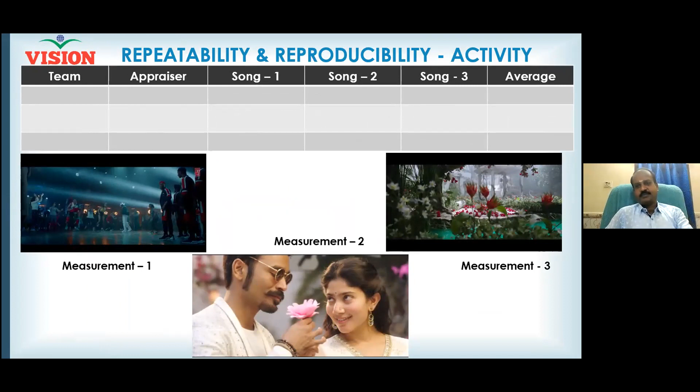Thank you, sir. We'll go to the calculation, and also we'll see one case study, and then you will become a master of this, and you can design. As I always say, as a black belt, you must create your tool which will work best for your process. You must find out.

Okay, now I go back. Just a second. Very good. All right.

Right, capital. Now the overall standard deviation I want to know. What is overall standard deviation? It will include repeatability error and reproducibility error. How to calculate repeatability error? Let's say Alok has measured a product 10 times.

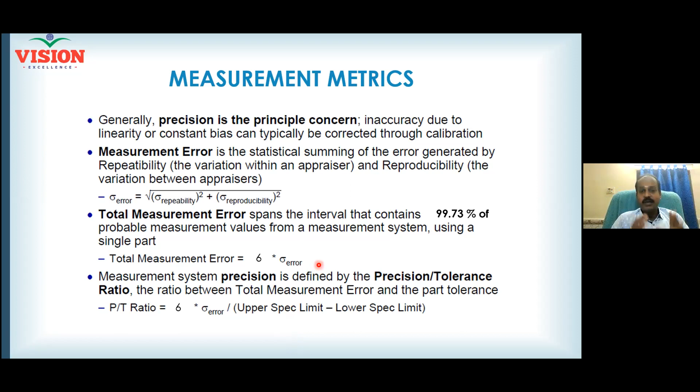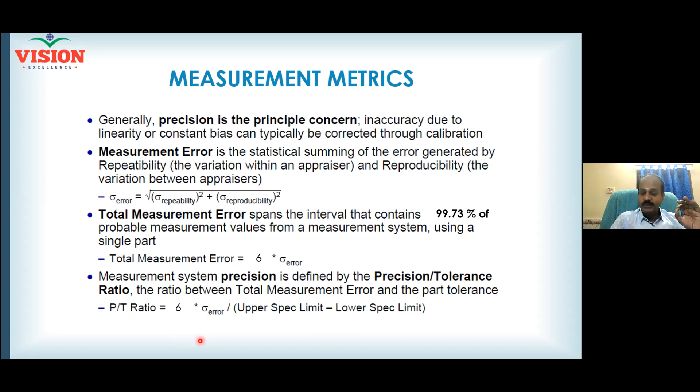What is acceptable is 10% or even less. This ratio is called the precision tolerance ratio. This precision tolerance ratio is otherwise called gauge R&R. Do all of you understand what gauge R&R is? Precision tolerance ratio - you know how to calculate the tolerance, and you also know how to calculate the precision. This ratio needs to be less than 10%. If it is less than 10%, you are sure your data is speaking the fact, the reality.

Otherwise, you must be cautious - your data is giving you a false alarm. You should know when your data will give a false alarm: when the measurement error is too much. Industry standard is less than 10% is always acceptable. More than 30% is always unacceptable. Never do a project with a measurement system having a gauge R&R of more than 30%.

The project itself should be titled 'improving the measurement system.' Don't get into an improvement project when you have a problem with the measurement system. The project title itself should be 'improving measurement system's accuracy and precision.' That is the title. So 10 to 30% is conditionally acceptable.

Now I want somebody to tell me where. So green and red are very clear - when gauge R&R is less than 10%, I am feeling good. More than 30%, I am very sure I should not use this measurement system. Rather, I will either replace the measurement system or run a project to improve it and then come back to my original project. What is the meaning of the middle one, 10 to 30%? Can somebody highlight on that? When will I consider my data as conditionally acceptable?

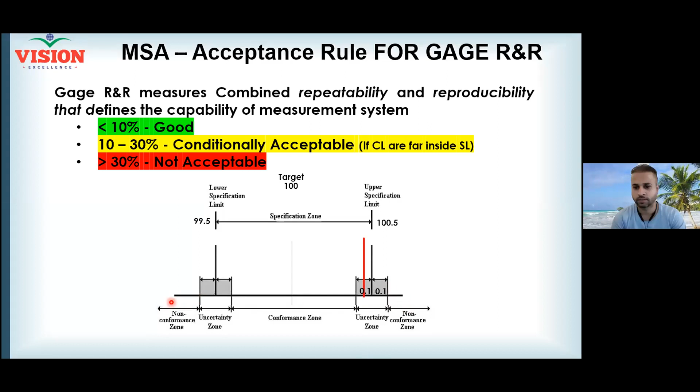What could be the dimension of this product at this point? Can somebody make a guess? Will it be less than 100.5 or more than 100.5? Less than, less than. Can you give me a sample value less than 100.5 which can lie exactly at the red color line? 100.4, 100.45.

Very good, beautiful. I take 100.45 to be safer on the center. Now 100.45 is the true value. Your quality inspectors are measuring the product. They commit an error of 10% because you estimated it. What is 10% of that error, which is 0.1?

100.45, either they will add 0.1 or they will subtract 0.1. If they subtract 0.1, they will place this product on the left side. Am I right? Yes, and then they will accept the product.

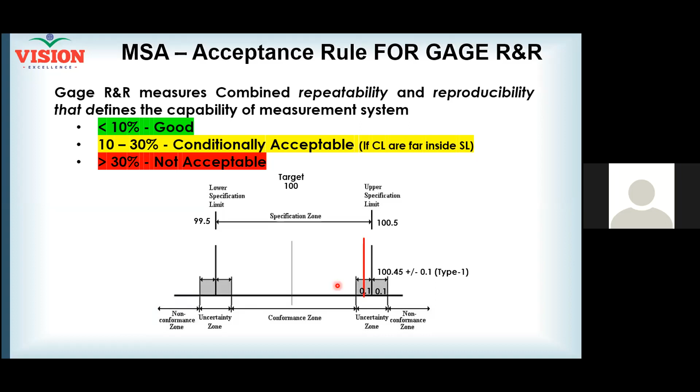Suppose if they add the error, they will place the product on the right side. Now what is right side? Your product will now be rejected.

Now, but what is the reality? Your product is uncertain, acceptable. The product is acceptable, but your team has rejected it. Your decision is getting affected. Do you still feel the error is okay for you? Even 10% is changing your decision.

Do you understand? Even 10%, though someone says for my company that 10% is also not helping me, that 10% makes me a wrong decision. I think that my product is good, or I think that my product is bad, but no, I do the opposite. My product is good, I reject it. But my product is bad, I send it to my customer. Am I doing favor to my business with my measurement?

Damaging. So it is not always advisable to produce product closer to the specification. Because even if you produce a good product, still your quality team can reject it. You are increasing that uncertainty more. So if I produce like this, it is not advisable. Am I right? Yes. So I won't do this.

I will try to produce everything far inside the specification limit. That is why we are always interested in seeing where is our control limit. If my control limit is well inside, well inside means, see my uncertainty zone. Earlier it was only this much. And now what happens? All my readings are well inside the conformance zone.

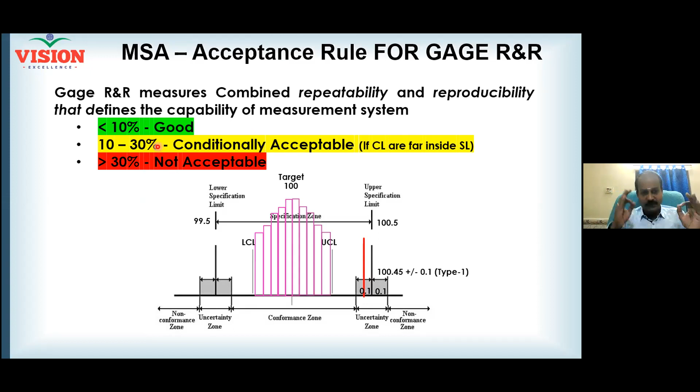Using the same data, I will analyze whether my repeatability is high or my reproducibility is high. If it is repeatability, now who is that culprit? Whether it is operator 1 or operator 2, who is more not repeatable or who is committing more repeatability error? I will give him special training. Who is not aligning with the system, thereby my reproducibility goes wrong. All that I will do.

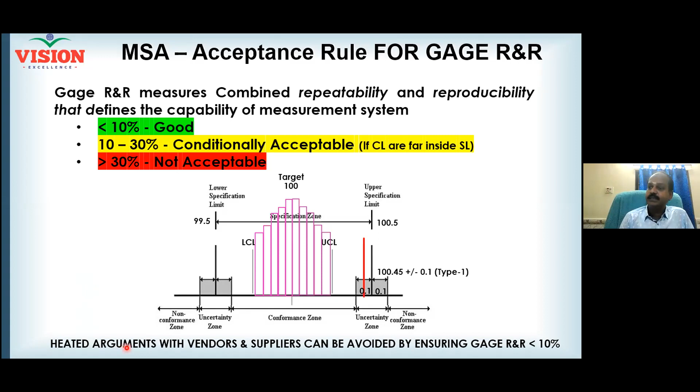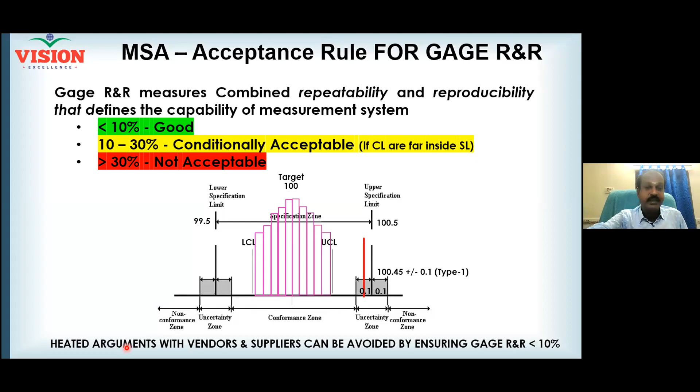So when you keep your measurement system under control, you can avoid heated arguments with your vendors, heated arguments with your suppliers, heated arguments with your consumers. How they measure, the same way you should measure. What reading they get, the same thing you must get. That means your measurement system is in order.

Now let us get into a small case, a simple case. I really don't want you to do all these calculations manually because Minitab will do it. You can do it in Minitab.

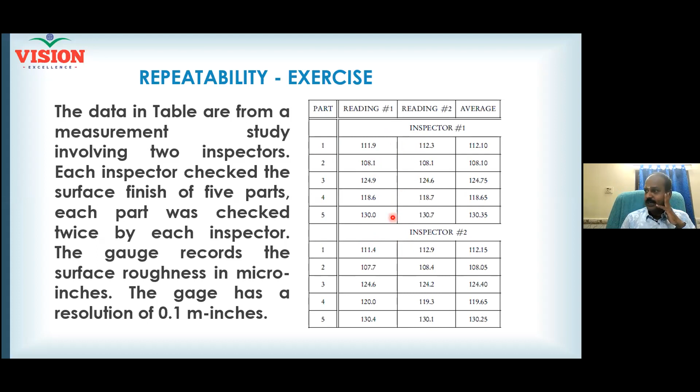Now see here, there are 5 products: part number 1, part number 2, part number 3, part number 4, and part number 5. How many quality checkers? Inspector 1, Inspector 2. Each product, Inspector 1 measures 2 times. Similarly, Inspector 2 also measures 2 times. So Inspector 1 produced 10 readings, Inspector 2 produced 10 readings.

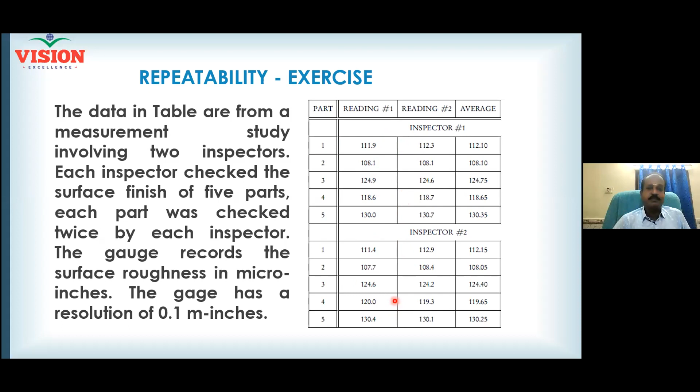Now, what is repeatability here? What is reproducibility here? Shall we calculate? Are you interested to understand the calculation? Yes, sir. Or if it is boring, you can use Minitab. Will you understand? Fine. So what I want is, and this is required, we'll come to the average later on, but first let us calculate the repeatability.

Now, there are 2 readings. These 2 readings are not the same. So this is called repeatability error. Now, since there are very less number of readings, instead of calculating standard deviation, please calculate range.

When to prefer range over standard deviation? If the number of readings in your hand are less than 8, don't calculate standard deviation, instead calculate range. Range is the difference. How much is the difference here? 0.4. Right. Now for the second reading, you can calculate. It's the same, so range is 0. So you have 5 ranges from Inspector 1.

Clear? More the range, more the error. So I am going to convert this information into error. Similarly, Inspector 2 has 5 ranges. Totally how many ranges? 10 ranges. Now I will calculate the average of the ranges.

Is it possible? Yes, yes. 10 ranges, I will take the average. That is called R bar. Now this R bar, I must divide by a factor called D2.

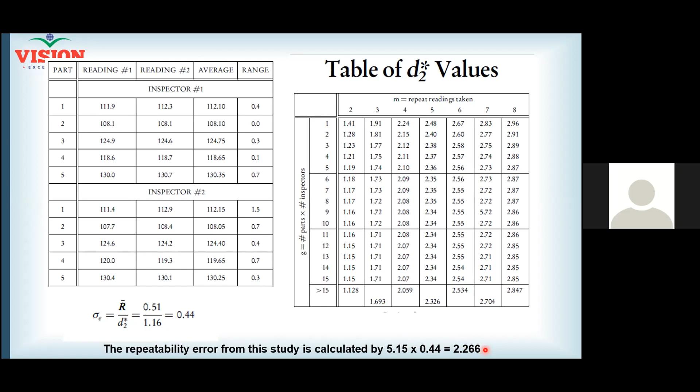What is this? Repeatability error. Where from did I get it? Sigma repeatability. What is sigma repeatability? You have seen in the calculation. This is how you must get it. Now we move on to reproducibility.

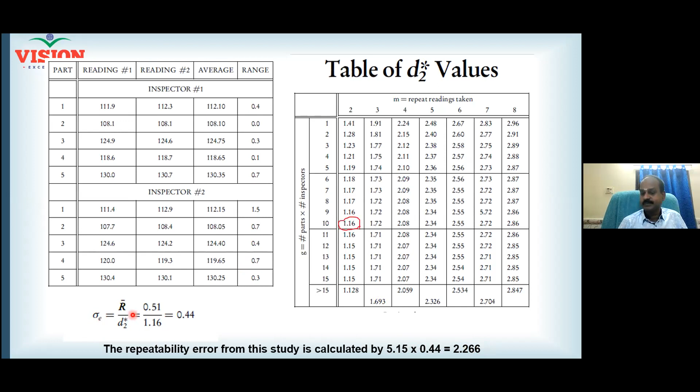So 1.16 we understood. Probably for reproducibility, we will use 1.41. I will tell you how it is. Let us go to the situation.

Now I need the average. You see, operator 1 for part number 1, he has 2 readings. So I take the average. You can add, divide by 2. How many averages? 5 averages. Again below, 5 averages. What is reproducibility?

The difference between the operators is called reproducibility. And how to find out the difference between the operators? He has 5 readings and I have 5 readings. How will I do it? I will calculate the average of operator 1 and then the grand average of operator 2, and find out the difference. When there are 5 averages operator 1 has got, I will calculate the grand average.

See here, 118.79. You know how this 118.79 came? Average of the 5 averages. Similarly, 118.90, average of these 5 readings. Already each number is an average. Now 5 averages, and now I calculate average of the average. And now 1 average here, 1 average here.

Now I calculate the range between the averages. Are we measuring correctly? Yes or no? Yes. We are trying to understand the difference between inspector 1 and inspector 2. Right. So the range I calculate, range is nothing but difference between the averages.

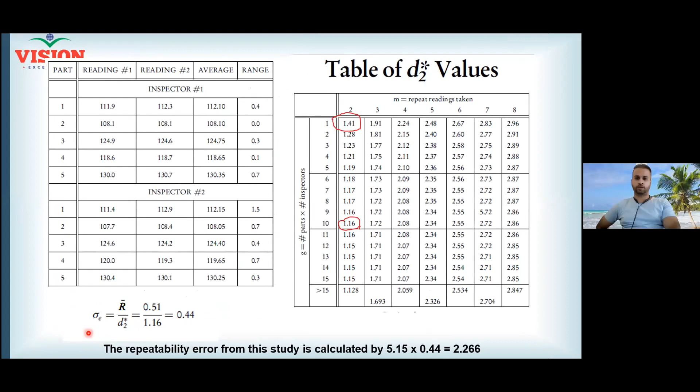Now I need to combine. Now see, when you want to combine, what you have is sigma. How will you combine sigma of reproducibility with the sigma of repeatability? I square them separately, add them, take the square root.

Finally, I know the overall precision, only this will retain. You will be able to retain 0.44 because reproducibility is 0. If it is not 0, I will combine it. So reproducibility is 0, but repeatability is there. Precision error is maybe 5.15 into 0.44.

Precision is understood. Now refer to your tolerance. Divided by the tolerance, that will be your gauge R and R. Will you be able to calculate? Yes. Okay, so this is to understand the calculations behind gauge R and R.

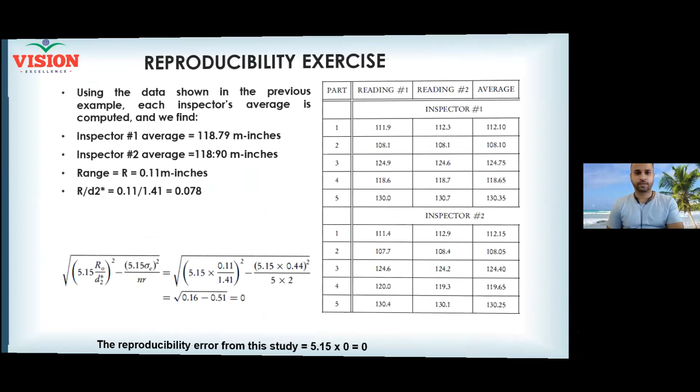Now, Sir, one question, sorry for interrupting. No problem, yes. So can we go back to the earlier slide? Yeah. Now here, what we have taken into account is that we are subtracting the repeatability error from the reproducibility R by D2. Yes, that is reproducibility minus repeatability, squared off and then taken square root. Correct.

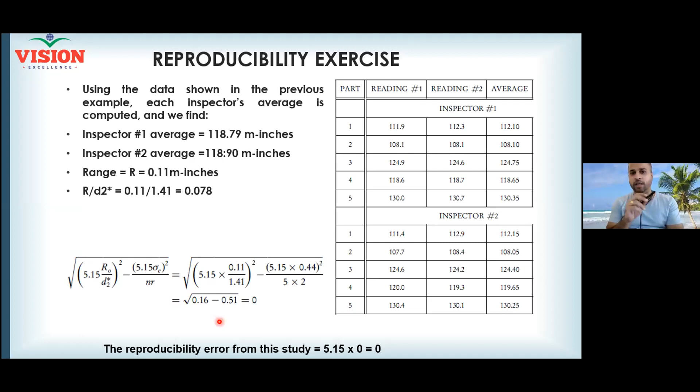Now, when we are calculating this, again we are squaring, again combining both repeatability and reproducibility. Once we have subtracted the repeatability here, then again finally we are adding the square to get the total impact. So does it not anyway neutralize it?

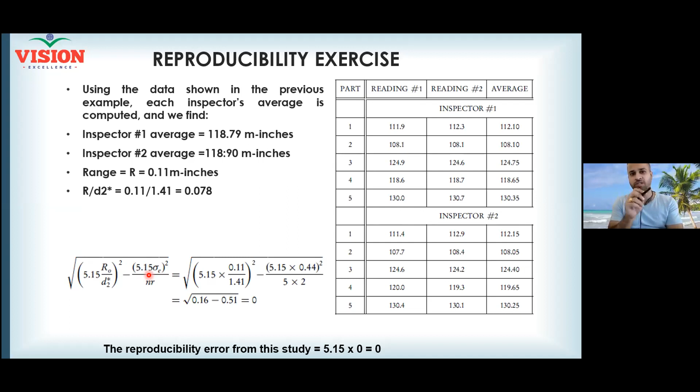No, I got your question, a good question. See, repeatability is one form of error that we have clearly figured out. We know it is 0.44. We are not subtracting the entire thing there. Now we are in the process of calculating reproducibility. For calculating reproducibility, I made use of only the averages.

Suppose if the number of repeat readings are 2, my average comes from 2 readings. Suppose if repeat readings are 3, my average will come from 3 readings. So average is nothing but the central point in your reading, the center of your reading. Since I just take the center, this reading definitely has the repeatability issue. When I take the center, half of the repeatability issue I am carrying in my average.

So this unnecessary carrying of the repeatability component should be eliminated from your reproducibility component. That's only the portion I am trying to eliminate here. I am not simply subtracting the repeatability error which we calculated already. No, that is different, no confusion there. We measure the repeatability, but here when I measure the reproducibility, I am not using the real data, I am using only the average.

And so that is an approximation. That approximation, I am trying to perfect by bringing a new element in my formula. That's how I go close to reality. So that is what you say in statistics, while calculating mean, sample mean, we are putting n-1, like that this is.

Yes, n-1, that's altogether a different subject. N-1 is called degree of freedom. To arrive at those kind of assumptions, only here also. Why do we go for n-1? We know always our sample value will differ from the population value. That's why instead of n, we change the formula to n-1.

Exactly. See, statistics is never 100% accurate. We are only trying to go closer to the reality. We will never say my decision is 100% confident. It is not mathematics, it is only statistics. So you don't need to really worry about each and everything. This is based on experience.

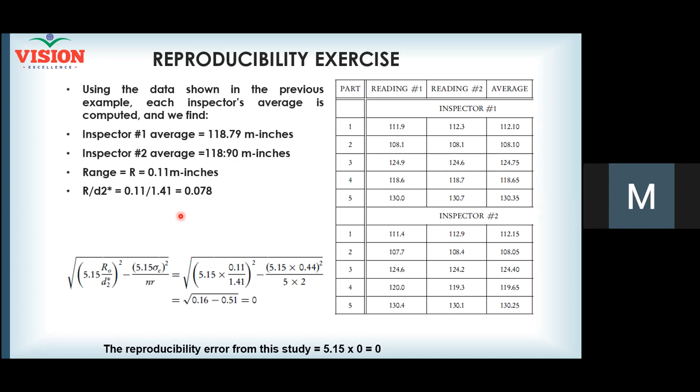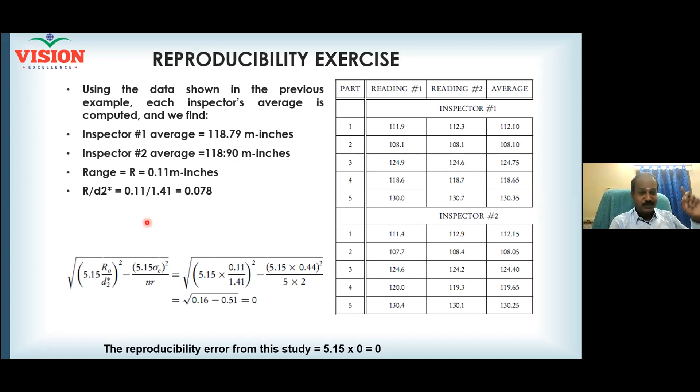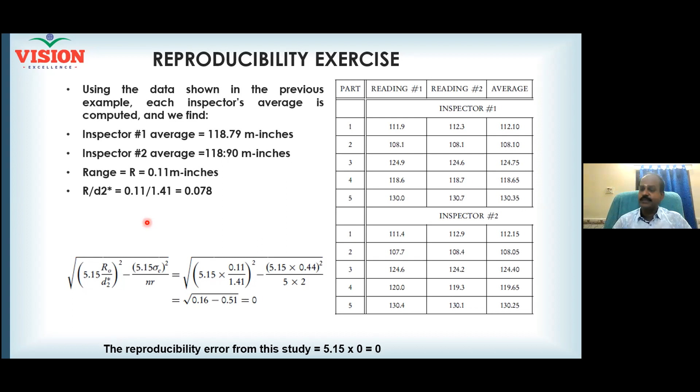But when my requirement is not measuring the error, but I really want to understand what is happening in real time, I will decide not to include the outlier. If I want to understand the error, I will include the outlier. If I want to understand the fact, I will remove the outlier. But of course, once you are used to many tools, you will automatically learn to handle the data.

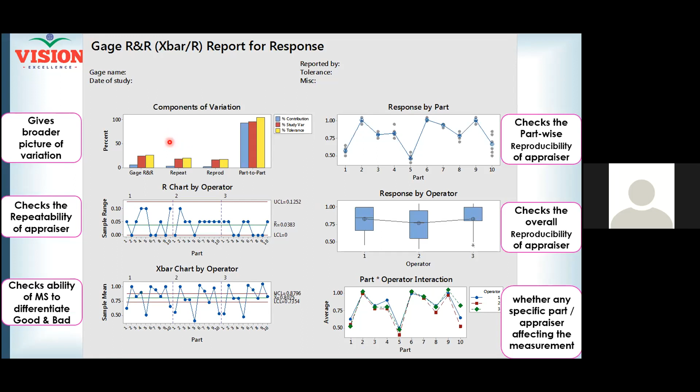In a histogram, the frequency levels are joined. Here they are separate. Both talk about frequency on the y-axis, but what is the difference? The difference is in the x-axis. In your histogram, the x-axis will be the same category, generally continuous data. Here on the x-axis, you have different categories, which we call attribute data.

You have different attributes - it can be January, February, March - then it is a bar chart. But if it's 100 mm, 102 mm, 104 mm, that is continuous data - 100 also diameter, 102 also diameter, 104 also diameter - then it is a histogram. Now you understand the difference between histogram and bar chart.

This is a bar chart. This bar chart lets you understand which is dominating in the error - whether repeatability is dominating or reproducibility is dominating. Why do you want to know? Then you can take action accordingly. So it gives a broader picture of the error.

This is called a control chart. It helps you check the repeatability of the appraiser. If Appraiser 1 is repeatable, all his readings will be close to the center.

Appraiser 1, Part 1, close to the center. But Appraiser 1, Part 2, not close to the center. So he is more repeatable, but here he is experiencing a problem - he has come far away from the center. So it checks the repeatability of the appraiser. By reading the graph, you can take the correct decision.

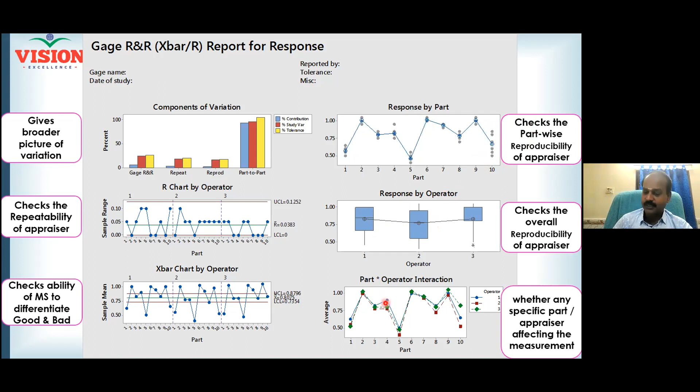Now bar chart - there are 3 bars available: a blue color bar, a red color bar, and a yellow color bar. The first one, blue color, is based on variance.

Red color and yellow color are based on standard deviation. The guideline I have taught you, given by AIAG, is based on standard deviation, not on variance. Of course, for variance also there is a rule, but for standard deviation, gauge R&R should be less than 10%. What is the relationship between standard deviation and variance? Can somebody tell me?

Variance is the square of the standard deviation. So you can talk about your error in terms of standard deviation, in terms of variance, or in terms of range. Our discussion is in terms of standard deviation.

So this blue color we are not going to use. Now within the red and yellow, what is our denominator? Denominator is tolerance. What is the tolerance? USL minus LSL. If you know USL and LSL, use the yellow color. If you don't know USL and LSL, you can use red color. Now all of you will be knowing USL, LSL, so remove the remaining. Read only the yellow color.

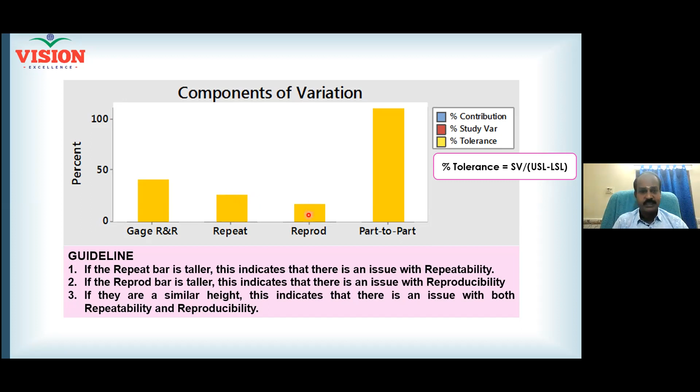Which is more, repeatability or reproducibility? Repeatability. This is your inference from this graph. That's all, now we move on. Second graph. Now when repeatability is more, you can take some action, right? You can go deeper, but for going deeper, we come here.

Now R chart by operator. What is this first reading? First product measured 3 times by operator number 1. Our expectation is everything should be close to the center. If the range is more, then you will see the point moving away from the center, because the center is R bar.

We are not aiming for accuracy now, we are aiming for consistency. We are trying to develop a system. System may be accurate or inaccurate, that we will deal separately. System should function as a system. If it fails, everybody should fail. If it succeeds, everybody should succeed. That is called a system, right?

So I want everything to be around the center. If it is moving away from the center, it will be a problem.

Now tell me, operator 1, operator 2, operator 3, who is better from your opinion? Is 1 better, or 2 better, or 3 better? 2 is better. Why is 2 better? Most of his readings are close to the center. So I will say 2 is more repeatable.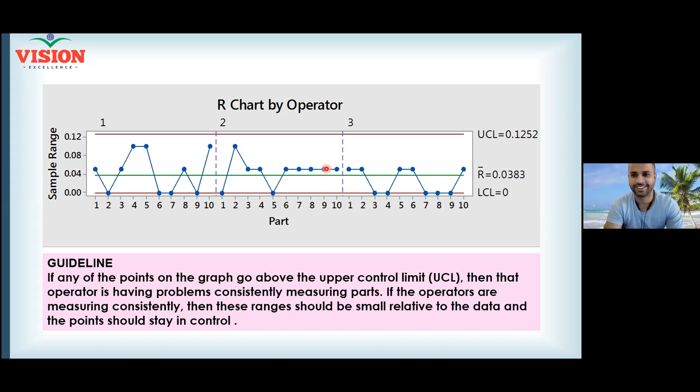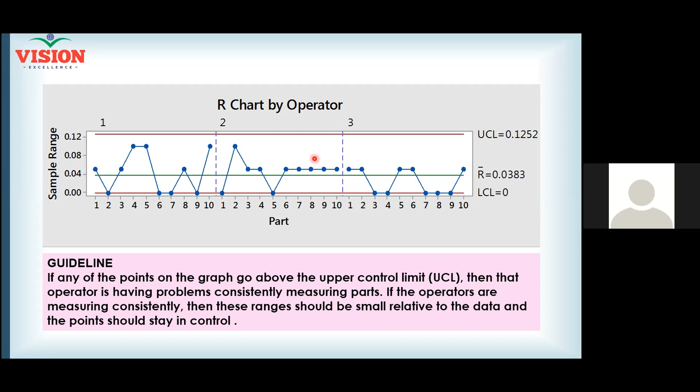Now our operator 2 is doing something abnormally. Though his readings are found to be okay, as a black belt, I am still able to figure out he is doing something abnormally, clear? He is not giving you the readings as it is. Maybe he is a smart guy, he knows that he is getting assessed. So you should be very careful.

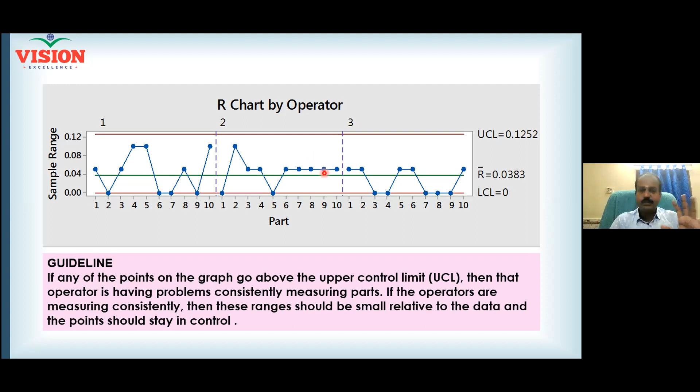First of all, in conducting the measurement system validation procedure, you should never let them know that they are getting assessed, clear? Don't tell them that they are getting assessed. Casually, in a daily routine, you must make them do the job for you. You bring the data and analyze it in your cabin.

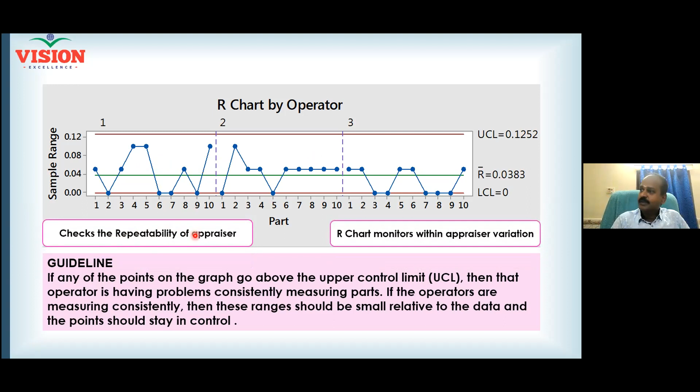Right, so this is how you must analyze, and then you can take some action. This is how this graph is helping. Now here this graph checks the repeatability of operator. It monitors the within operator variation. Every point talks about the within operator - within operator means repeatability. If each repeatability is controlled, overall repeatability will be under control.

Now X bar chart - what is X bar chart helping you with? Each point here is an average. See here, this is the first point measured by first operator 3 times, so this point is the average of the 3. This is the second point, average of the 3 readings from part number 2. It goes like this. Here the expectation is your X bar chart should throw out at least 50% of the points outside control limit.

Do you know why? Earlier our expectation is all the points should be closer to the center. Here our expectation is at least 50% should be outside the control limit. Why should it come outside the control limit?

How did you choose the product for a measurement system analysis? Who selected the product? You only selected it. You selected and you made them to measure. You should know how to select the product. Now tell me, will you select the product from left extreme to right extreme, covering the entire extreme, or will you select only one product?

Selected between the right and left extreme. Very good. I need to select the product from left extreme till right extreme. Otherwise, what will happen? I will not be able to understand how my people measure good product and how my people measure bad product - both I want to know.

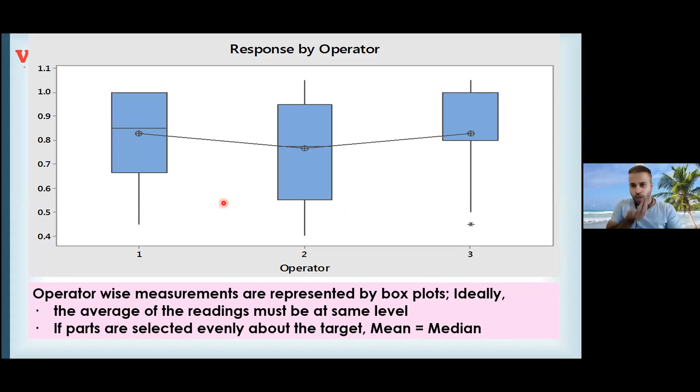2 is correct, I will advise 1 and 3 to change. Suppose purposely when I selected four parts on the left side and six parts on the right side, now mean will differ from median. Now 1 and 3 are correct.

2 is wrong, my advice will now be to operator 2, not 1 and 3. Do you understand how I should help my team? For that I should have certain knowledge, because you are the one doing this measurement system analysis assessment. You are the one who selected the parts. How do you select? It triggers the decision, right? There is no common rule because you are playing the game. How do you play? You should also know how to score marks out of it.

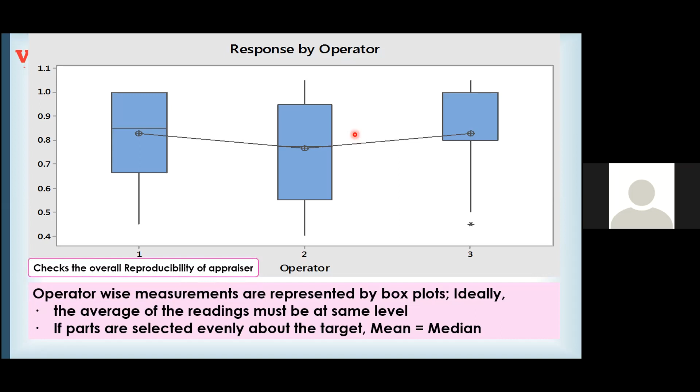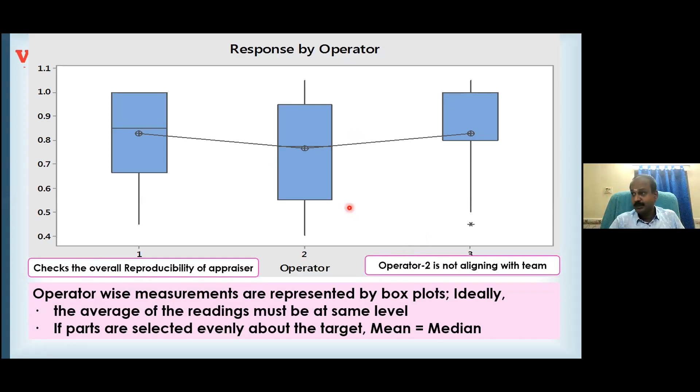So it checks the overall reproducibility of appraiser. Operator 2 is not aligning with the team. I am saying this because I know my parts are evenly selected. Otherwise, instead of saying this, I will say that 1 and 3 are not aligning. 2 may be correct, isn't it? It depends. Now, interaction - this is something you will understand in detail during the analysis phase.

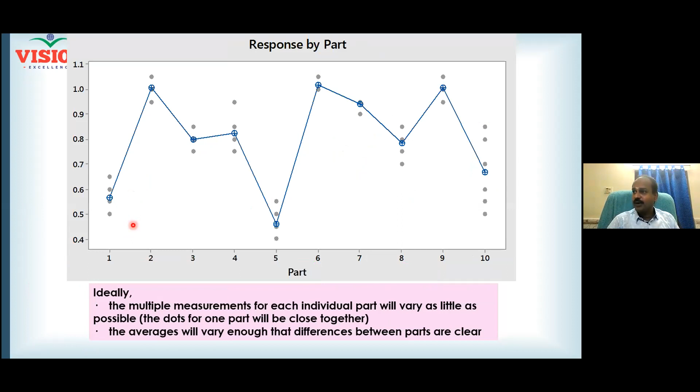In fact, this graph is nothing but overlapping of all 3 X bar charts. Do you see the X bar chart? I overlap one graph over the other. If all of us are measuring the same product in the same way, let us commit error. Is it not important that all of us commit the error at least in the same fashion?

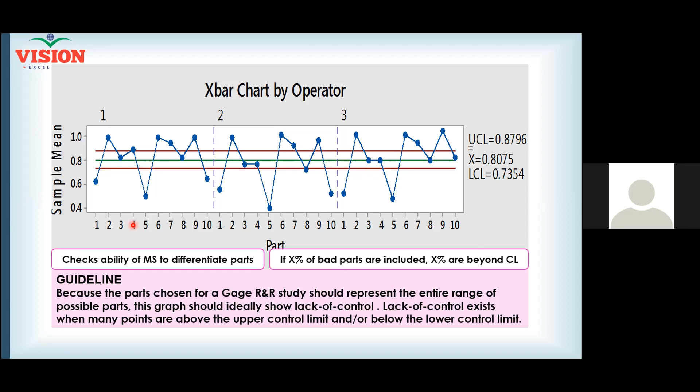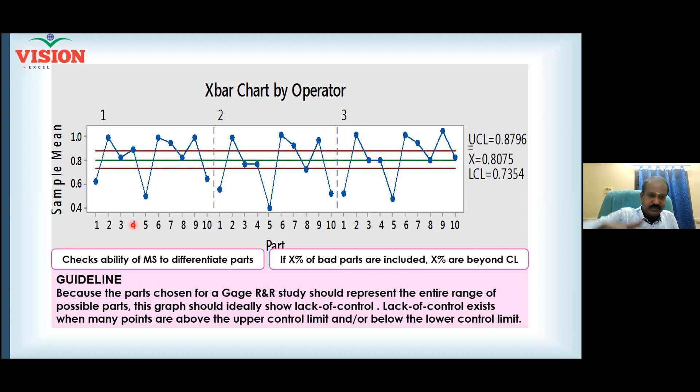Yes. When I commit an error, positive bias, you should not give a negative bias. When I say 100 as 102, you should not say 98. What does it mean? We are completely against each other. At least we can commit error, but at least our path should be same - whether that is happening or not.

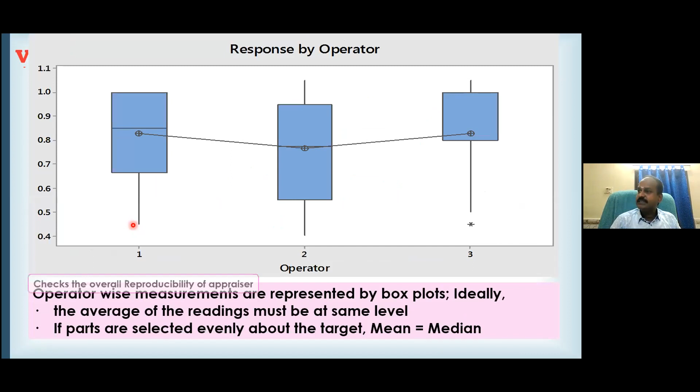One is going in a positive direction, another one is going in a negative direction. So you should not be able to see the lines intersecting each other. You should not be able to see gaps between the lines. If all of them overlap, all 3 colors should look like a single color.

One should overlap with the other. First problem is they are separated. Next problem is they are intersecting. Intersection should be addressed first, and then parallelity should be reduced next. This is how you must analyze.

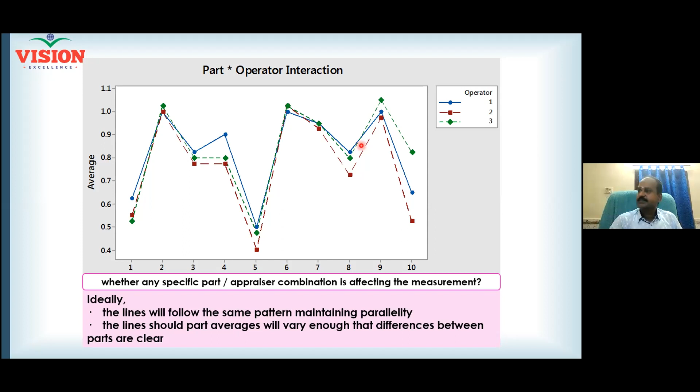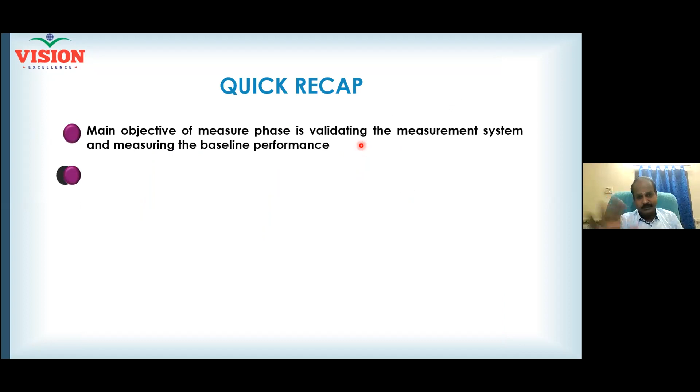So the main objective of the measure phase is validating the measurement system, and then only you must proceed with the measurement of baseline performance. Otherwise, you might think that your rejection is 12%, but actually rejection may be 18%. You should never do that mistake.

And basic statistics is very important. Afternoon or tomorrow you will have a session. Give importance to all the statistical discussions. Otherwise, you can only say mean, median, and mode, but will not know the difference between the three. That's very important.

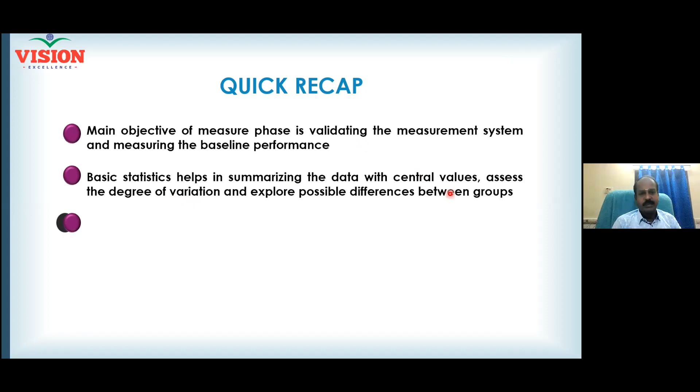Statistics helps you to summarize the information with the central value. Central values are mean, median, and mode. And it helps you to assess the degree of variation. Range, standard deviation, and variance are the parameters that can help you understand the degree of variation. Only when central tendency and variation are understood can you make comparison. Otherwise, your comparison is not fair.

And the terms like bias, stability, and linearity are responsible for your accuracy in the reading. But precision is the result of your resolution and gauge R&R. You can be precise if the resolution is great, if the gauge R&R is less than 10%. You can be accurate if the bias is 0, if your readings are stable, if your readings are linear. So this will be discussed separately.

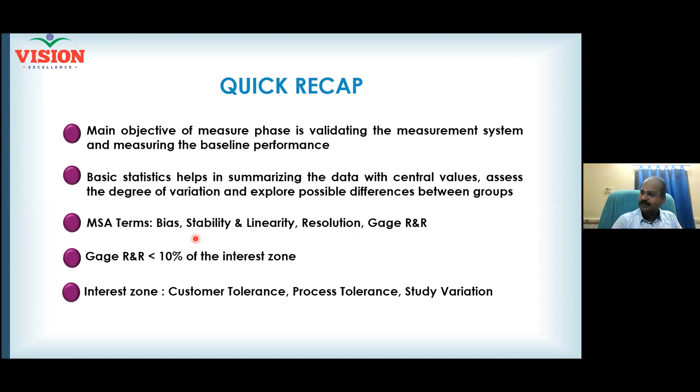Gauge R&R should be less than 10% of the tolerance, right? And generally tolerance is customer tolerance. Sometimes people work on process tolerance, sometimes people work on study variation, but this is the best method - customer tolerance. So that's it from the gauge R&R. Thank you for giving me extra time.